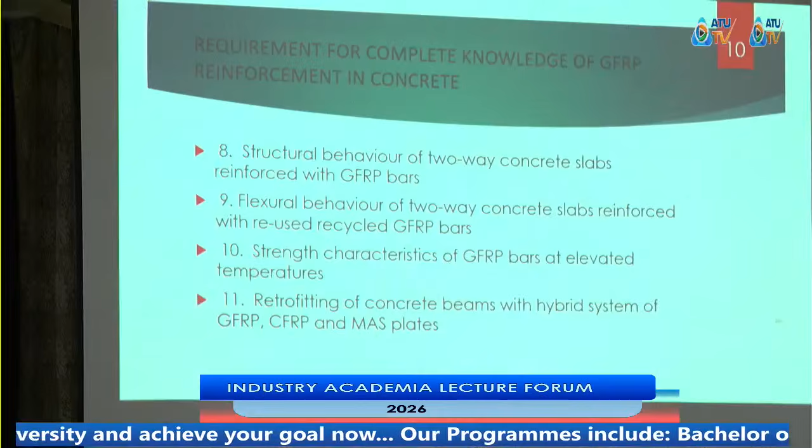At KNUST, we conducted some research works, including the mechanical properties of glass fiber, and one of our presenters will come out with findings that indicate the strength is dependent on the bar size, which is not like steel. The modulus of elasticity is also dependent on the bar size, and so on. Then the behavior of glass fiber in beams and slabs have also been studied.

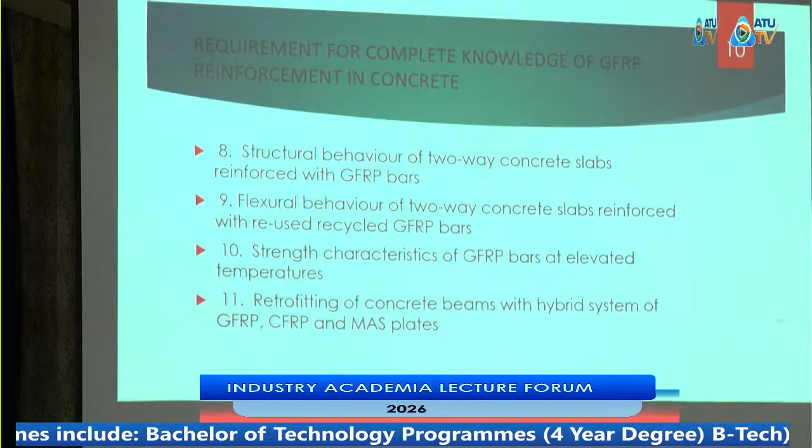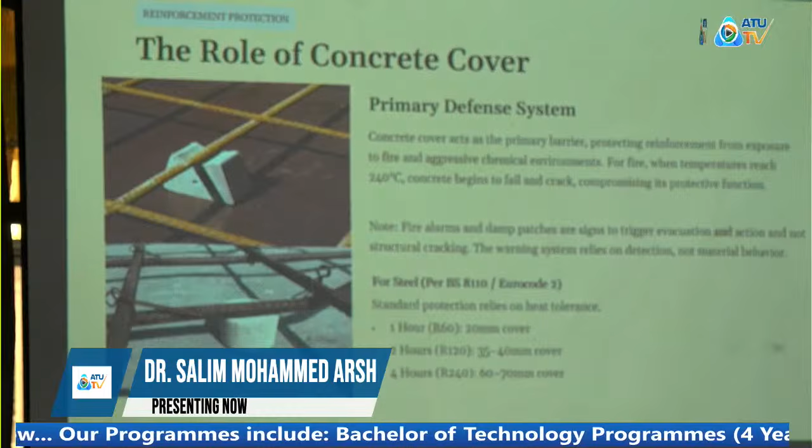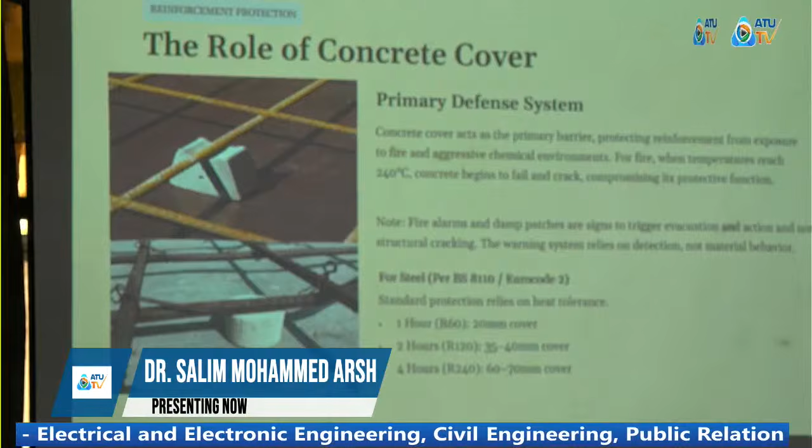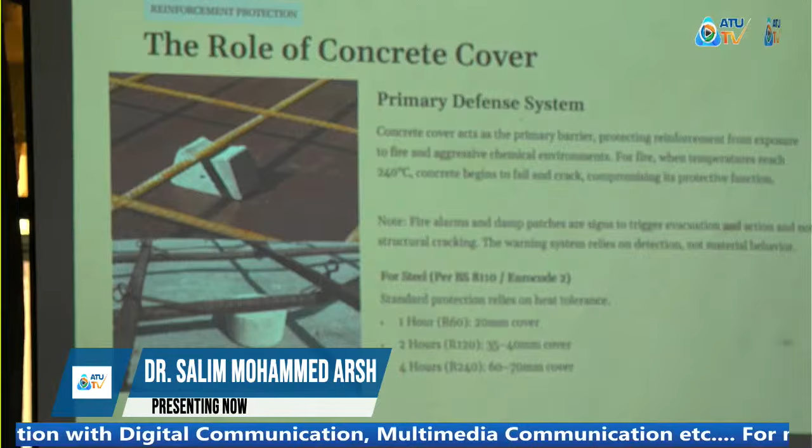Starting with this slide on concrete cover: before discussing the reinforcement itself, it is extremely important to understand the role of concrete cover, because concrete cover is the primary protection mechanism in reinforced concrete structures. It acts as a thermal barrier, a corrosion protection layer, and also a durability protection system, because in an instance of fire exposure, the external surface temperatures could go up to 800 or 1000 degrees Celsius. However, because concrete has relatively low thermal conductivity, the heat penetration towards the reinforcement usually occurs gradually as per how the code specifies. For instance, BS 8110 and Eurocode 2 specify standard protection according to the amount of time needed for evacuation upon occurrence of a fire, to prevent the sudden collapse of the structure once heat gets into the reinforcement. We can move on to the next slide.

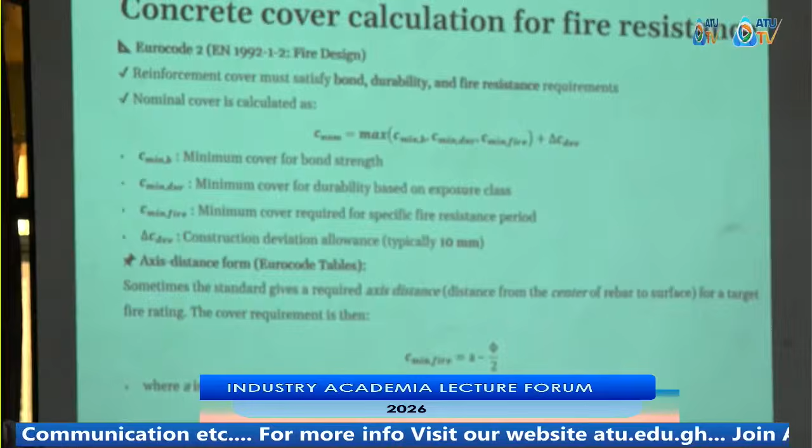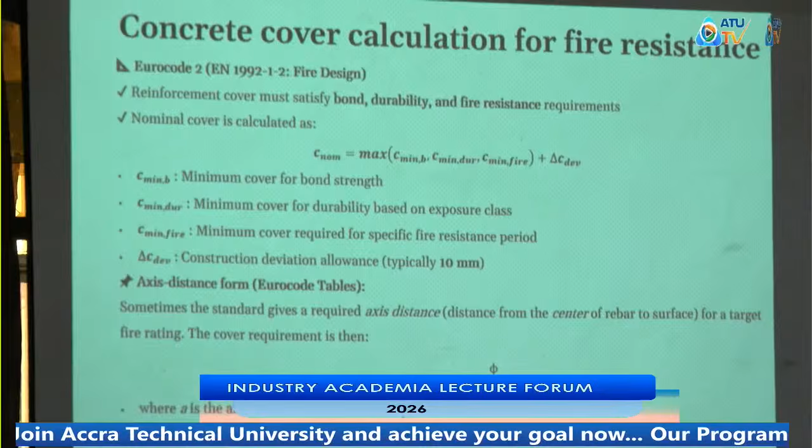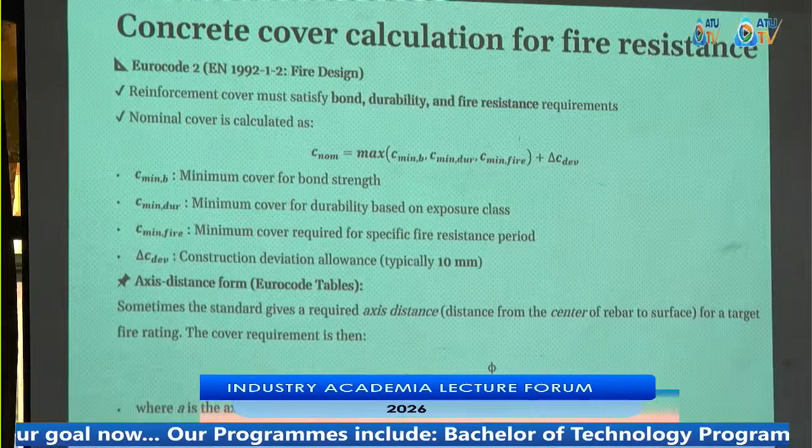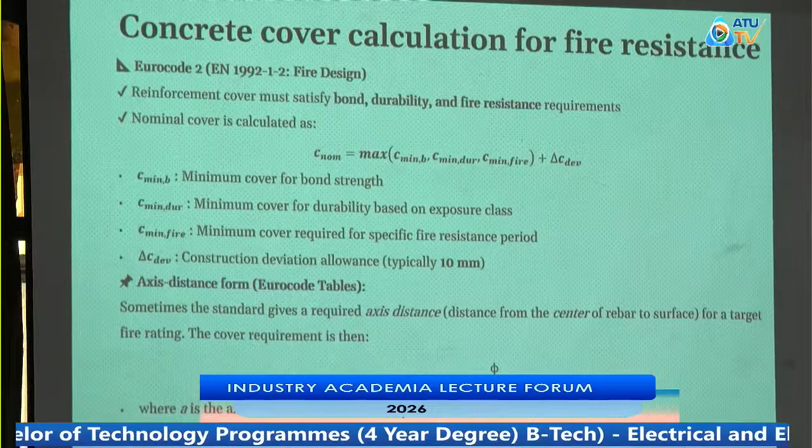This section basically emphasizes the previous slide, showing the calculations for concrete cover and how crucial and specific it is in the design, because this ensures corrosion, fire, or salt water does not get to the reinforcement. This is the protection of the fiberglass reinforcement, the steel reinforcement, and the other FRPs. So this is an emphasis of the concrete cover and design calculations. We can move on to the next slide.

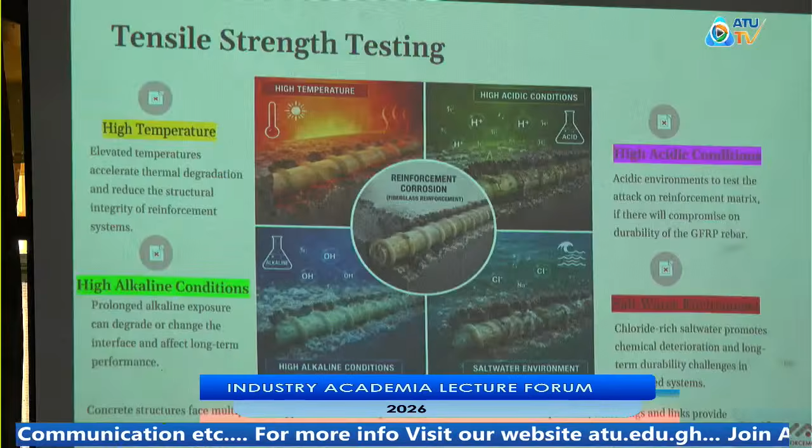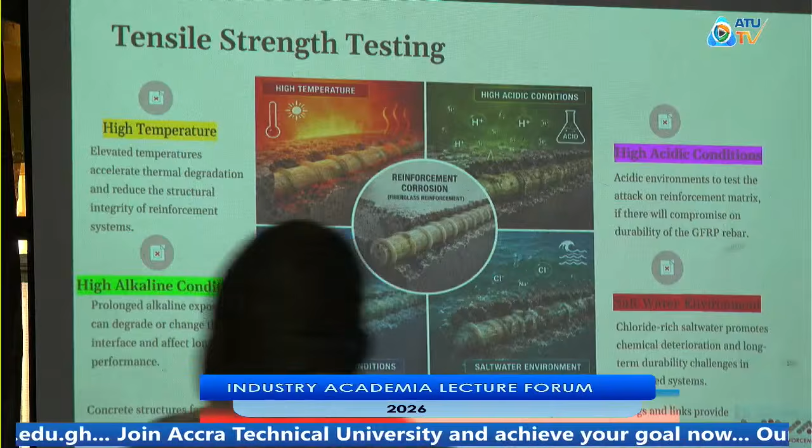Moving on to my first test at university level, which was tensile strength testing under different environmental characteristics, trying to test the limits of the Viva bar. Most of the research I found from Ghana had already tested the basic tensile strength, from Professor Kankam and the researchers, so I wanted to take it a step further and test it against high temperatures. For high temperatures, I picked 240 degrees Celsius. Why 240 degrees Celsius, if you ask? Because this is the temperature at which the concrete cover is compromised and cracking becomes visible, and at this stage the fire is already reaching the reinforcement inside.

This is the stage where the fire is already reaching inside the reinforcement, which at this point would already be compromised. So I subjected the samples to high temperatures.

Next was high acidic conditions, trying to test the corrosion of the fiberglass rebar material, because we know steel reacts with acidic conditions and gets eaten away. I concentrated a 0.1 molar sulfuric acid, achieving a pH of about 1.54, a very concentrated acid, and subjected the samples for 7 and 28 days to test early and late stage corrosion.

Then I moved on to high alkaline conditions, since concrete is highly alkaline. I subjected it to concentrated calcium hydroxide, because material properties could change once the fiberglass is submerged inside concrete. I did this as well for 7 and 28 days, for early and late stage curing.

Finally, I exposed it to a salt water environment, because where I'm from, a coastal island in Mombasa, Kenya, salt corrosion of steel bars is very high. You leave reinforcement outside for 1, 2, 3 days and start seeing rust on top, which in the long run affects the performance of the material.

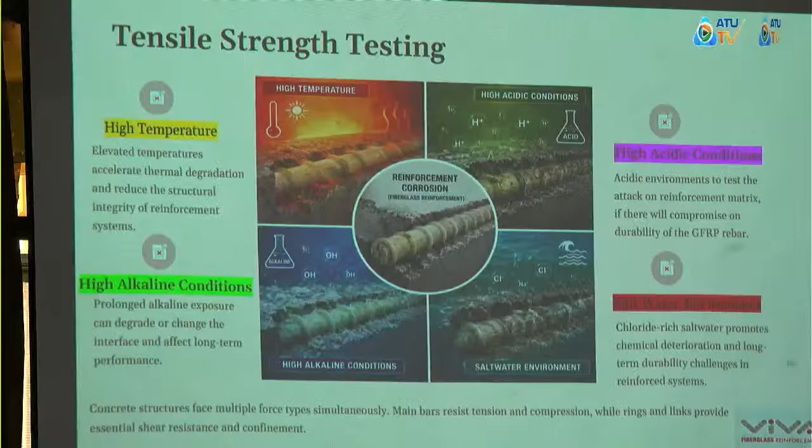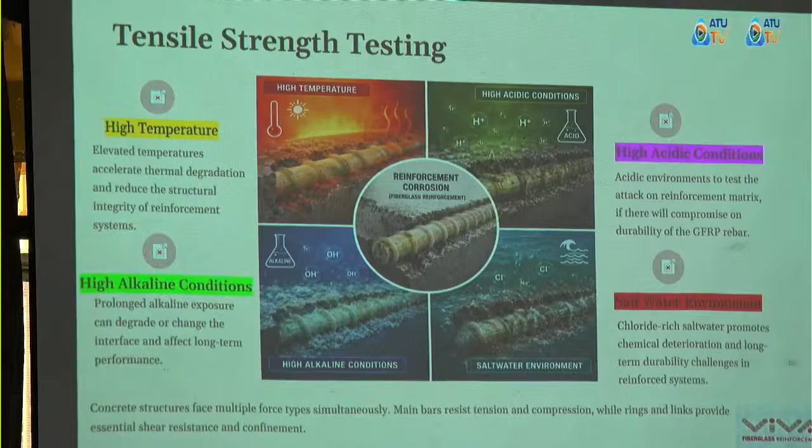After subjecting the reinforcement to these harsh environmental conditions, I can attest there was barely any change in tensile strength, basically between 3 to 5%. All samples achieved a minimum of 1,150 megapascals, with changes of only 3 to 5%, which is not significant. The material is not corroded by acidic conditions, not affected by temperatures of 230 to 240 degrees, not affected by high alkaline conditions, and not affected by saltwater environments like steel reinforcement is.

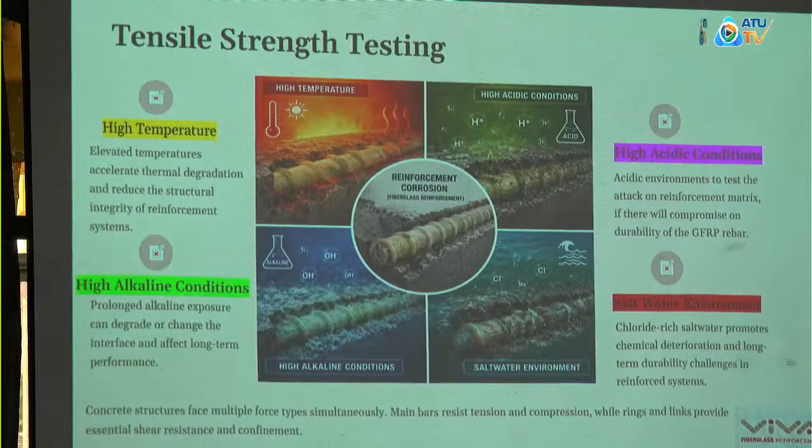Moving on to the next slide, which is impact testing. This section evaluates the toughness and sudden load response of the Viva bar using Izod and Charpy impact testing, because these tests are important since structures are not always subjected to gradual loading.

In real engineering situations, structures may experience impact loading, vibration, accidental force application, debris loading, and sudden stress. These are things that should be catered for at the material level, even before putting it inside the concrete.

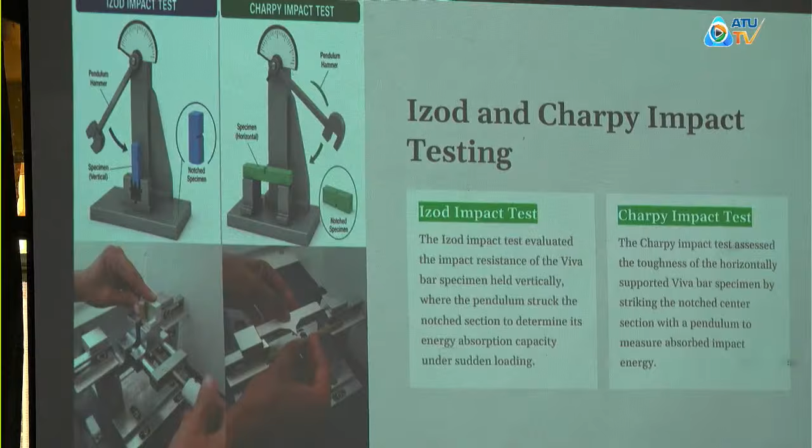The Izod test evaluates impact resistance using a vertically fixed position, and the Charpy test uses a horizontally supported specimen to evaluate toughness through impact energy absorption.

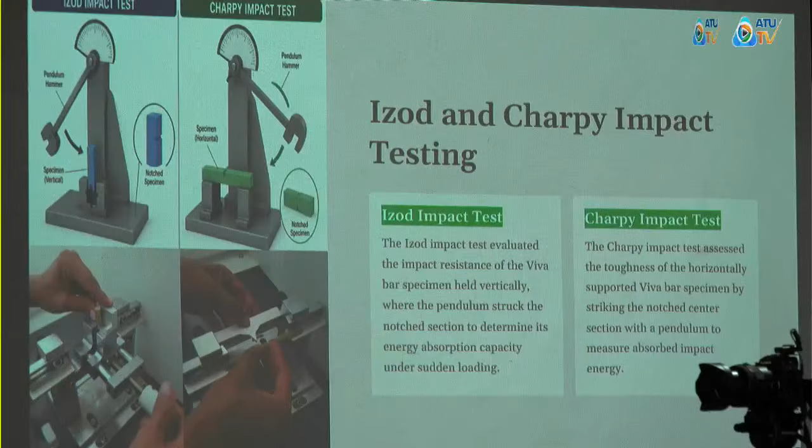One important observation during this test is that the Viva bar did not fracture completely, unlike other specimens put in that machine. This behavior is important because it indicates internal energy absorption, crack resistance, and progressive failure characteristics.

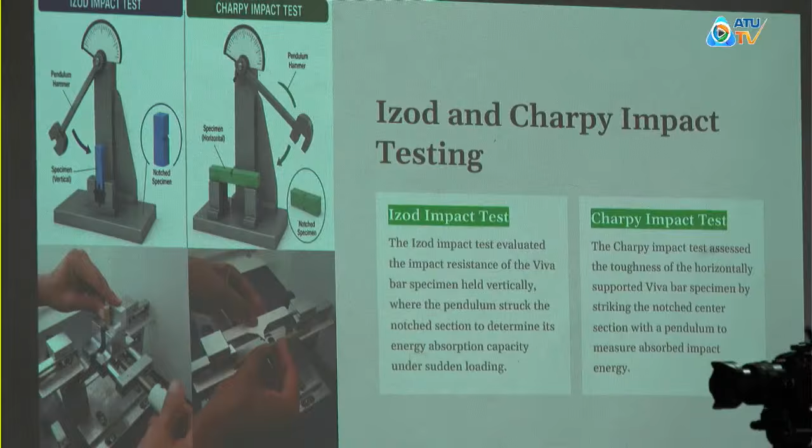For younger engineers and students here today, one important concept to remember is that strength alone does not signify structural performance. Things like toughness, energy absorption, and impact resistance are equally important, because structures must survive unexpected loading conditions, seismic activities, wind loading, and other unforeseen catastrophic failures.

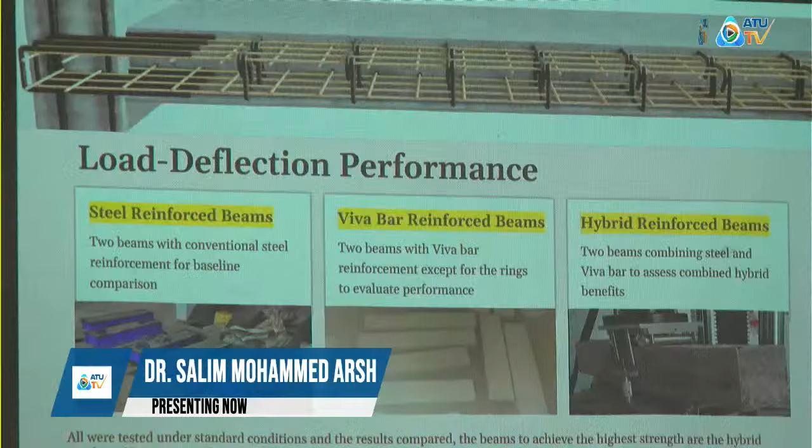Moving on to the next slide, which took me a really great amount of time, this was the beam loading test, beam flexion. For this, I cast 6 beams: 2 were reinforced fully with steel, and 2 others were reinforced with fiberglass, except for the links and U-shapes at the ends.

The last 2 beams were reinforced with the hybrid approach that Viva is vouching for: in the lower members, where there is high tensile requirement, I used the Viva bar, and in the top members, which are subjected to compression, I used regular steel from the market. I left the beams to cure for 28 days before taking them out and putting them in the flexure machine.

The beam that achieved the highest strength was the hybrid beam, because this ensures the materials complement each other: steel contributes to compression and shear at the ends, which fiberglass is not able to do as effectively, while fiberglass handles tensile strength better than steel and holds a much higher strength when it comes to tension.

So the hybrid systems, as I've said, benefit from complementary material behavior, and it is a very important engineering aspect, because modern structural optimization does not necessarily involve replacing one material entirely. Instead, it involves combining materials intelligently so that each material contributes where it does best. And this is the fundamental philosophy behind the hybrid system. Moving on to the next slide.

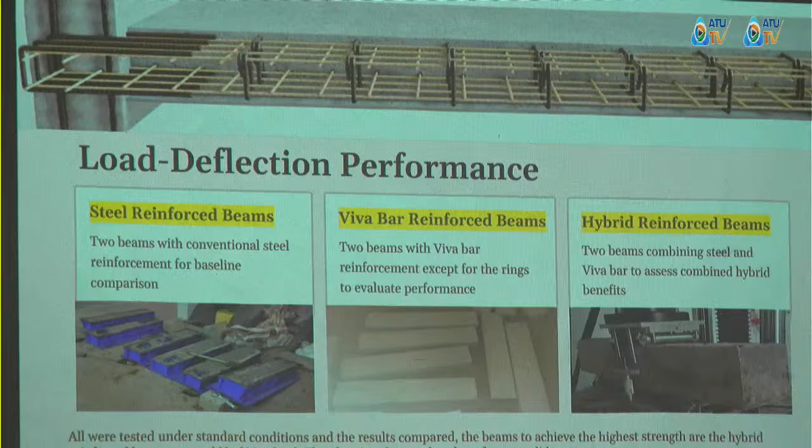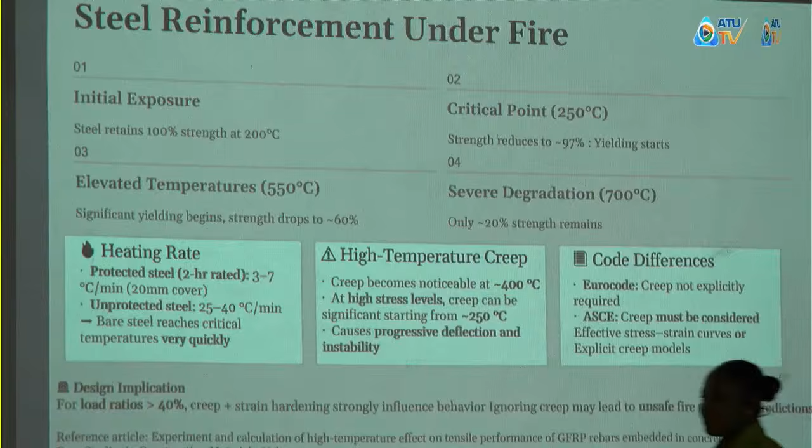This is a test I've done, and I have an article on fire comparing the fire exposure of steel reinforcement to Viva bar reinforcement. As you can see, the steel behaves predictably under elevated temperatures, up to 200 degrees Celsius. Above 200 degrees Celsius, when we get past the point where concrete starts to fail and crack, at this stage the fire is exposed directly to the reinforcement.

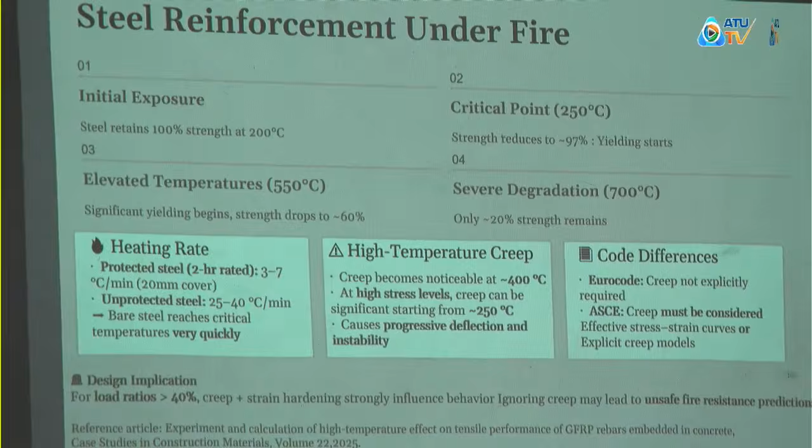This is where steel's graph, according to the ASCE models and the Eurocode models, shows yielding starting. Once the yielding starts and temperatures continue to rise, steel's rate of yielding once exposed to fire is very high, so the failure is abrupt. The time for evacuation, 60 minutes, is usually designed for the concrete cover. But once steel is exposed directly to fire, it no longer holds its ductility as much, because the graph of its loss of strength goes down drastically.

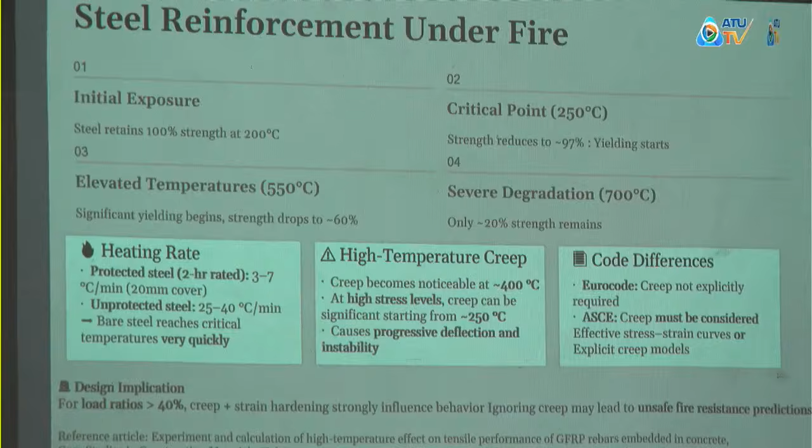As you can see, at 250 degrees Celsius is when yielding initiates and the stiffness begins reducing, and deformation becomes more significant. Even taking temperatures higher to 550 degrees Celsius, steel reduces its strength to about 60%. The deflection increases rapidly, and creep becomes highly influential at this stage. By getting to 700 to 1000 degrees Celsius, only a small portion of the original strength is left, and this is where the building becomes structurally unstable and collapses.

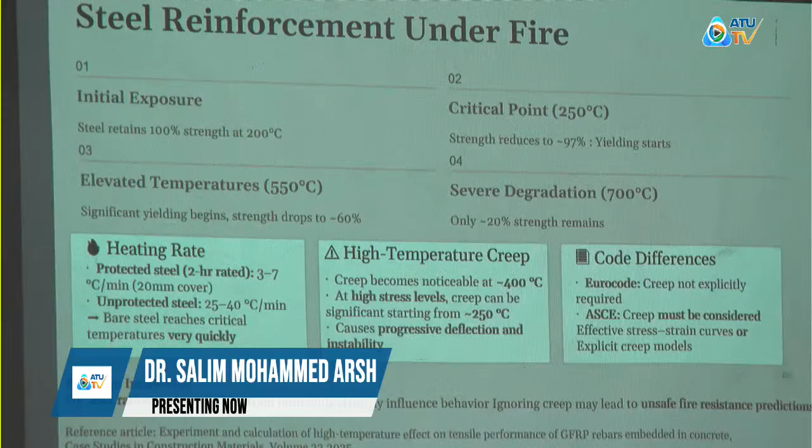An important highlighted issue here is the thermal conductivity of steel, which I'll show on a further slide. Steel transfers heat very effectively. This means that fire exposure in one region can affect reinforcement temperatures across a large structural area. So even unexposed regions may weaken due to heat conduction of the reinforcement network, and you'll be able to see this visually in the next two slides, and I'll explain it better.

However, the Viva bar's performance under fire depends heavily on two temperatures: the glass transition temperature and the decomposition temperature. At approximately 250 to 300 degrees, which is the same temperature where the concrete cover is compromised - that's why I keep stressing the importance of the placement, the spacing, the stools, and the concrete cover to protect the reinforcement from such catastrophic failures.

Between 250 to 350 degrees Celsius, the fiberglass bar has already been exposed to fire. At this stage, the resin matrix begins softening, the stiffness of the material reduces, and the bond efficiency starts to decrease. Raising temperatures to 400 degrees Celsius, resin decomposition becomes significant, and tensile performance starts to reduce rapidly because of the bond strength of the matrix. The fiberglass strands themselves are not affected at 400 degrees Celsius - they're very highly temperature resistant.

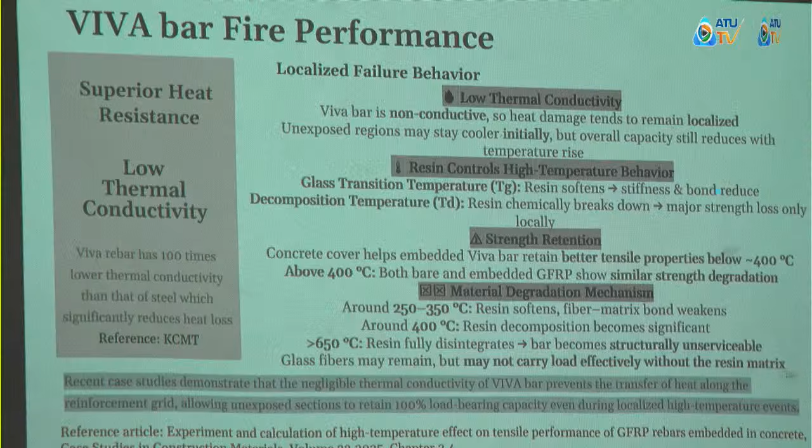Moving up above 650 degrees Celsius, the resin matrix now becomes fully disintegrated. One important engineering observation is that the concrete cover delays this disintegration process for the embedded bars, both for fiberglass and steel, which again reinforces the importance of concrete cover in the material.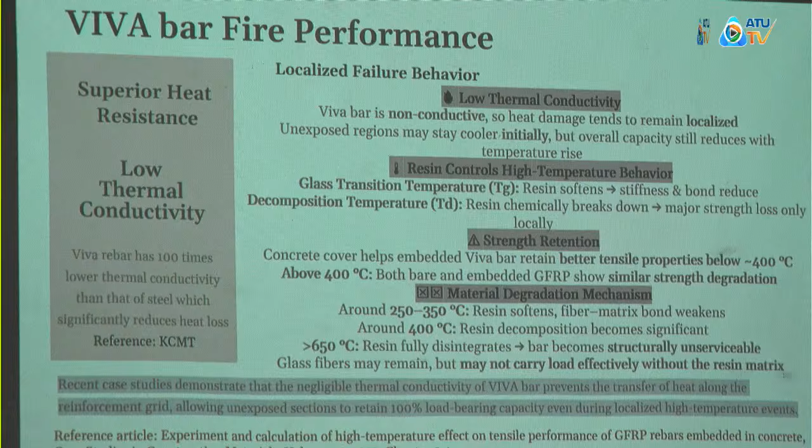Now, the next slide is drawn from the fire analysis of steel and Viva bar that I've done, because this slide highlights one of the most important differences between steel and Viva bar on thermal conductivity. Steel is highly conductive, and once exposed to fire, the heat spreads rapidly throughout the reinforcement network, increasing system-wide thermal degradation. Because of the 100 times lower conductivity, according to the KCMT article, this heat remains more localized in the Viva bar. For instance, if one part of the slab experiences fire exposure, there is no conduction that would lead to heat generation in a system-wide nature.

This does not entirely eliminate the degradation, but it changes and limits the heat effect onto one part of the slab, increasing the time for evacuation and for people to be safe and secured inside a building experiencing fire. From a structural engineering perspective, this becomes highly important when looking at localized fire mechanisms and system level resilience. This is also why hybrid reinforcement systems are becoming increasingly important in advanced infrastructure design.

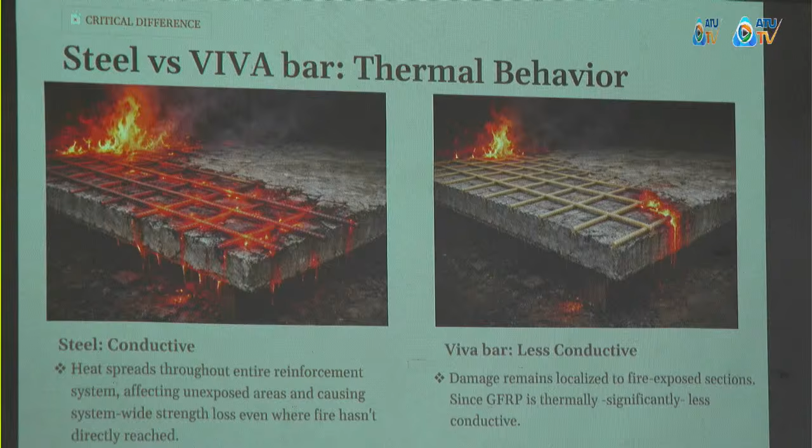Moving on to my conclusion and recommendations. This research demonstrates that fiberglass reinforcement provides significant advantages in corrosion resistance, durability, sustainability, and reduced maintenance requirements.

However, the most important conclusion is that no reinforcement is universally perfect, and good engineering design is not about replacing one material blindly with another, but about understanding behavior, structural interaction, environmental exposure, and long-term performance.

This is why us young engineers and researchers should take the opportunity to criticize the material, to look at what tests we can do, how we can improve on whatever we are working on, and what technology is out there that can be explored to increase the efficiency of our already built and placed structural designs.

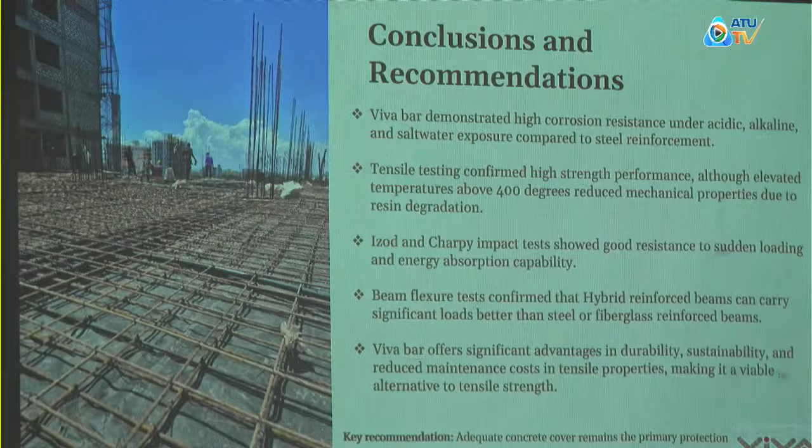Because the hybrid philosophy, according to my conclusions, represents an optimized approach rather than a replacement strategy, since steel contributes in compression, shear, bending, redundancy, and the established fire behavior that is already there, while the Viva bar contributes corrosion resistance, high tensile properties higher than steel, low thermal conductivity, and improved durability performance.

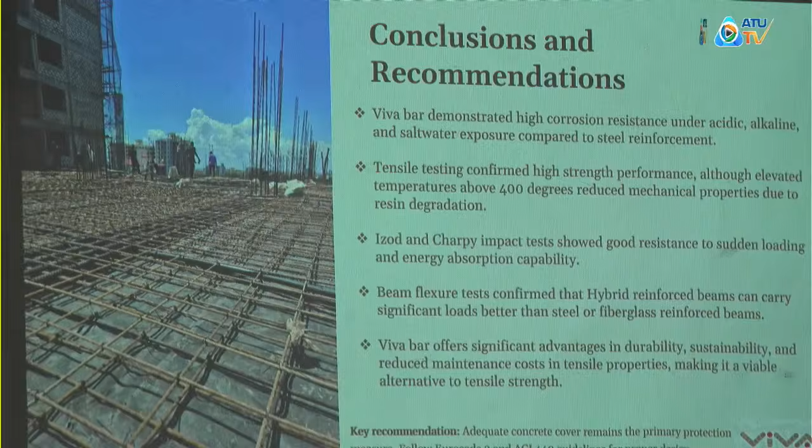So these two materials - you have to see how they can both work hand in hand to achieve the best results. Together, they create a more balanced structural system, and this is where the future of advanced reinforced concrete design is moving.

Before I conclude, I would also like to say a few words to the upcoming engineers present here today, because engineering is a very wide field. Sometimes when I was a student and a young researcher, we think engineering is only about passing exams, attending lectures, and completing projects. But in reality, engineering has a much bigger scope than that, because it's about problem solving.

Engineering is about innovation, curiosity, research, and continuous self-development. One thing I strongly encourage myself and the audience present, especially the students, is that you need to become more proactive very early. Do not wait until graduation or when you receive the paper to start building your engineering capability.

There are things you can learn besides the curriculum. You can learn software design, the design analysis that is out there, the structural softwares that are used. You can visit sites, join research programs, ask questions, and read research papers - like Professor Kankam has a lot of them, and he has a lot of research students. You can start from there.

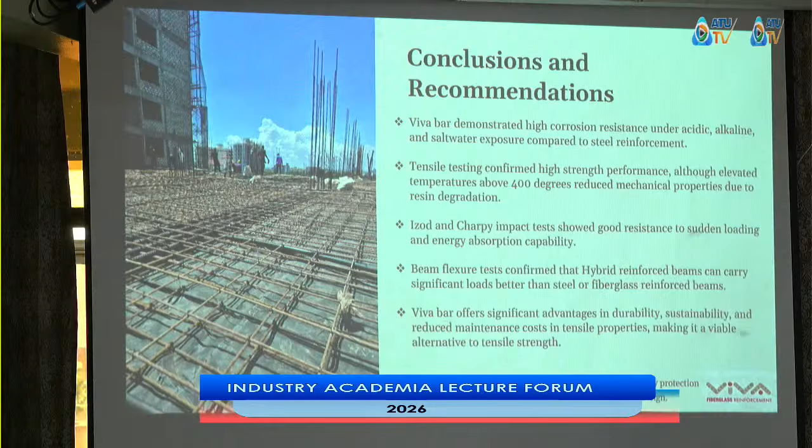Engineering as a whole has very many niches, because some engineers are excellent in structural analysis, some in materials - it's a wide field: transportation engineering, water engineering. There's a lot you can look into to develop yourself for further knowledge and broadening of the mind, because no one has studied everything. There's always something you can add on, always some sort of value you can add to yourself.

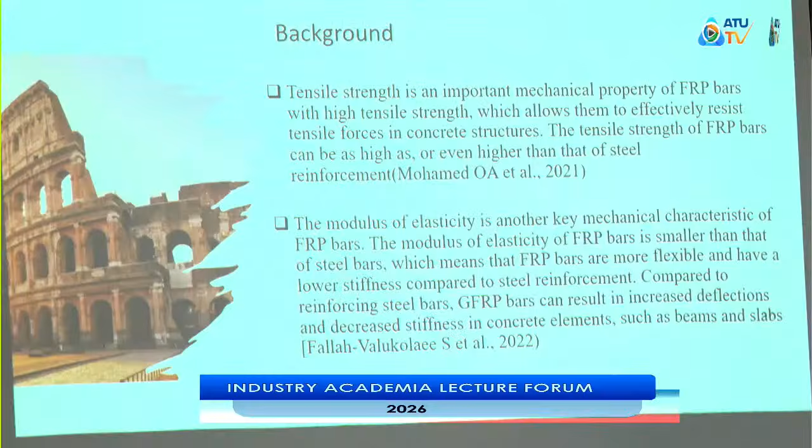Okay, so tensile strength is an important mechanical property of FRP bars, like already said, with high tensile strength, which allows them to effectively resist tensile forces in concrete structures. Okay, so the modulus of elasticity is another key characteristic of FRP bars. The modulus of elasticity of FRP bars is smaller than that of steel, which means that FRP bars are more flexible and have a lower stiffness compared to steel reinforcement.

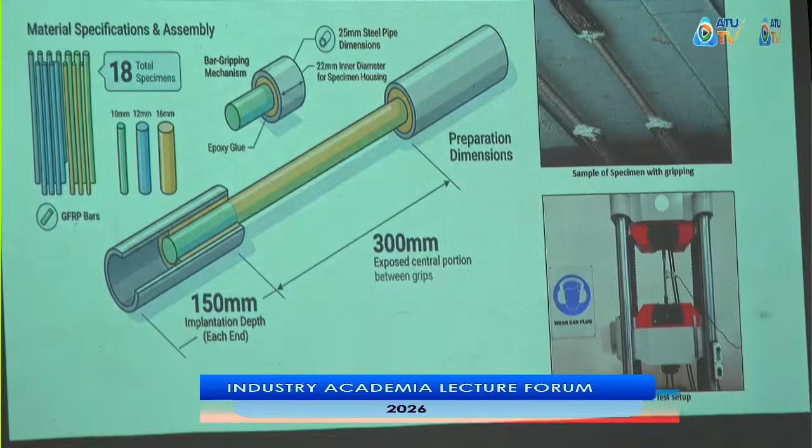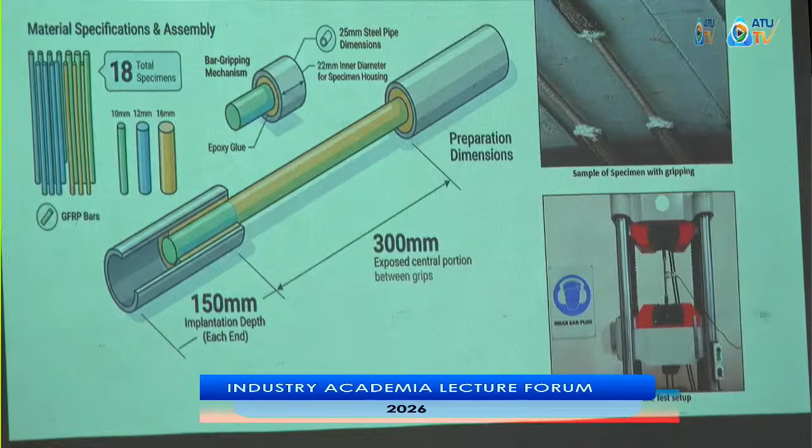In preparing the specimen, the researcher had 18 total specimens of GFRP bars, and cut 300 mm lengths of the GFRP bar. Because the ends of the GFRP bar fracture when in compression, the researcher had to hook the ends with a 25 mm steel pipe and use epoxy glue to hold it so that the tensile strength test could be performed.

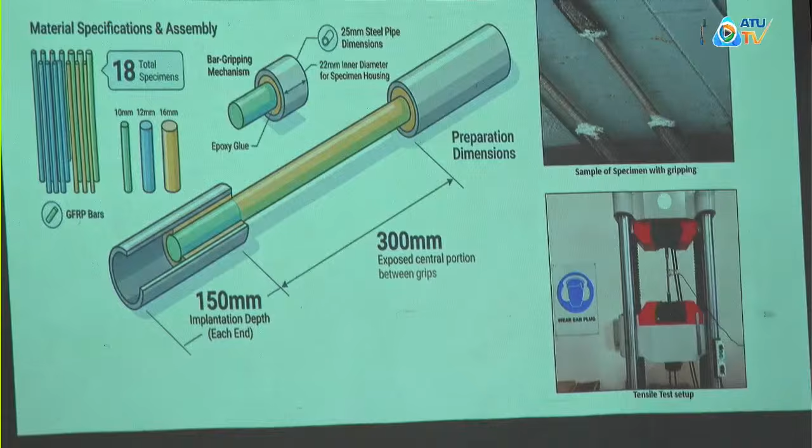Here is a picture of the sample specimen with a grip shown at the top right, and the universal tensile machine used to test the tensile strength.

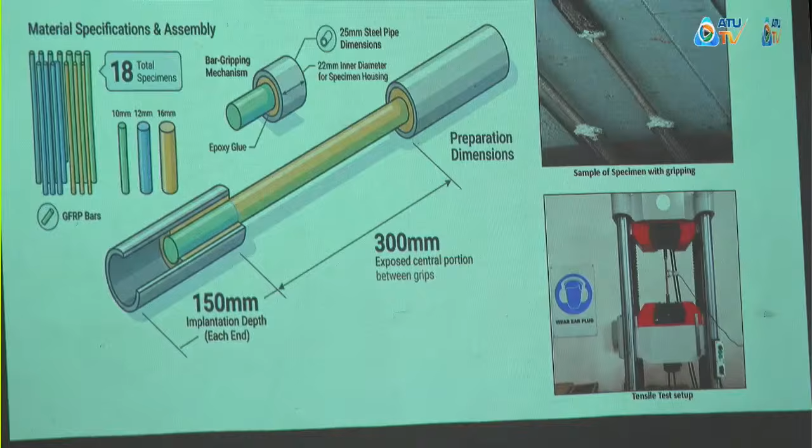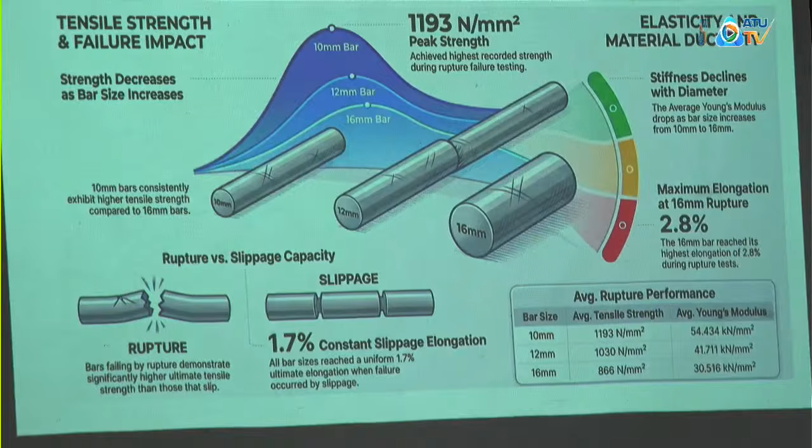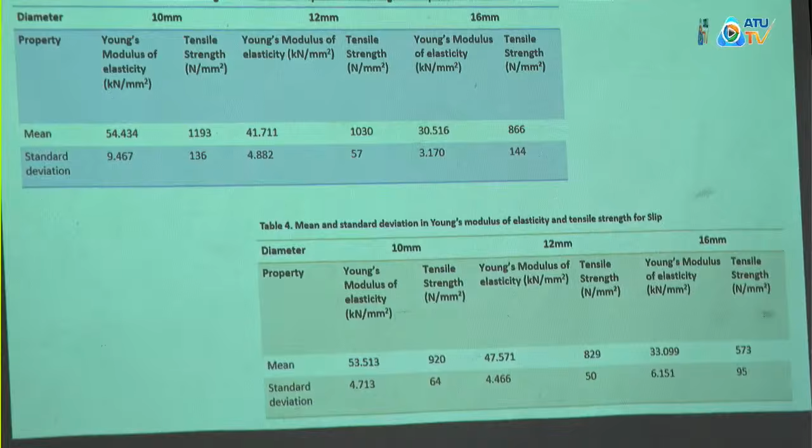This table also gives the results of the GFRP mechanical properties. For each diameter of bar - 10 mm, 12 mm, 16 mm - we have the Young's modulus of elasticity and the tensile strength. For tensile strength, the 10 mm bar has 1,193 newtons per millimeter squared, the 12 mm has 1,030 newtons per millimeter squared, and the 16 mm has 866 newtons per millimeter squared, showing that the smaller the diameter, the higher the tensile strength.

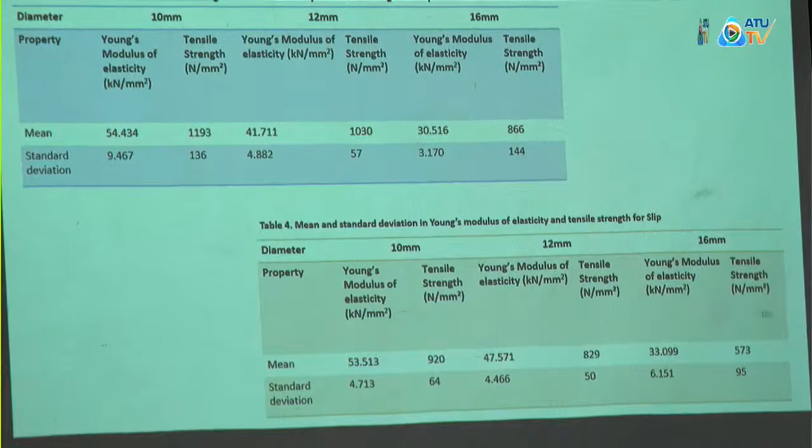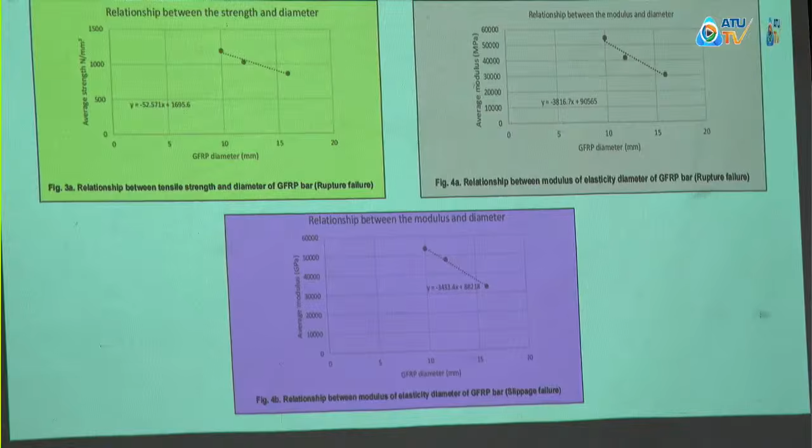This is a graph of the relationship between the bar diameter and the strength.

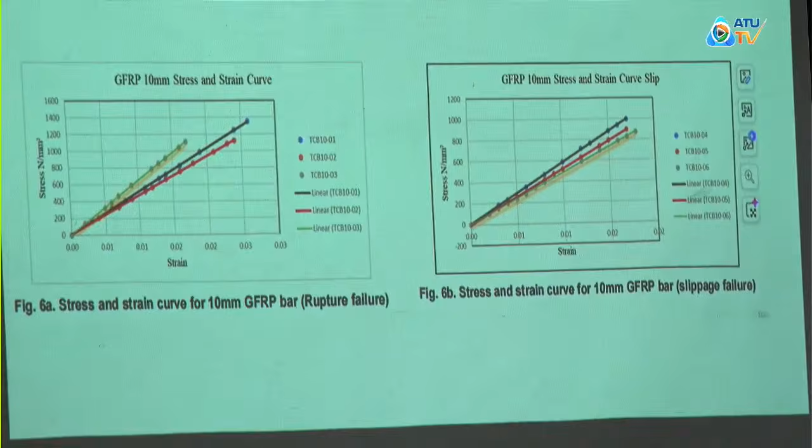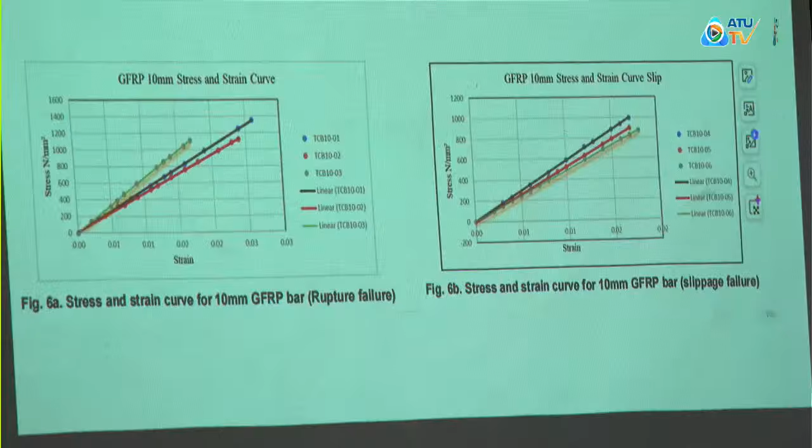Here we have the stress-strain curves of the GFRP bars. As earlier cited by Professor Kankam, the researcher realized that the GFRP bars are linearly elastic. We have the stress-strain curve for the 10 mm bar when the GFRP ruptured, and the stress-strain curve for the 10 mm bar when there was slippage failure. In both cases, the GFRP bar is linearly elastic.

The same applies for the 12 mm and 16 mm bars.

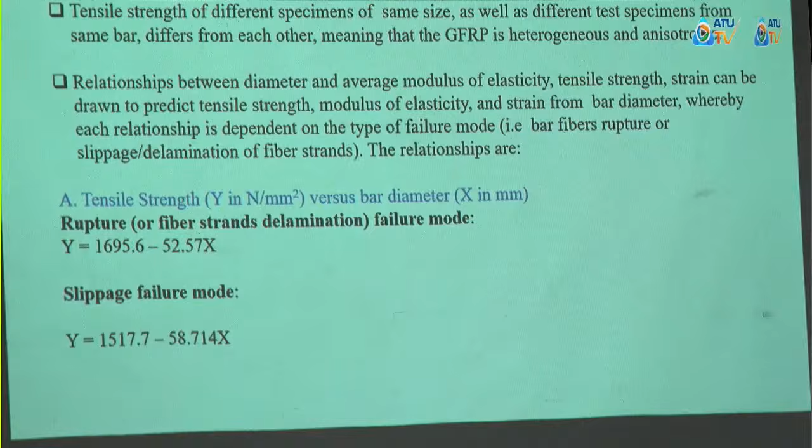Tensile strength of different specimens of the same size, as well as different test specimens from the same bar, differs from each other, meaning that the GFRP is heterogeneous and anisotropic. There is an equation for the rupture mode and the slippage failure mode.

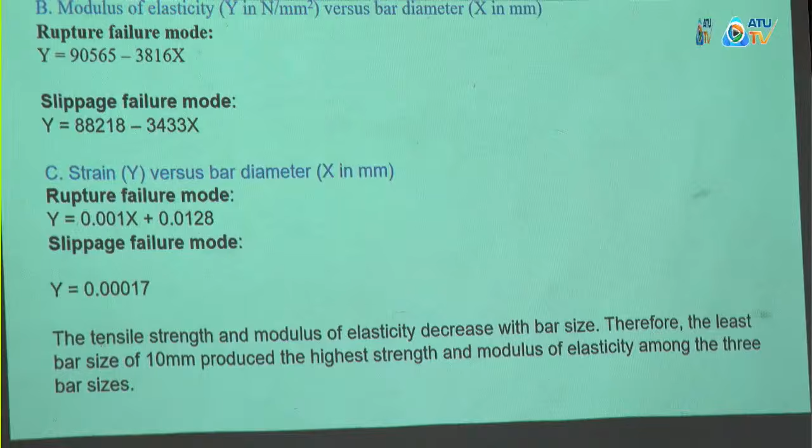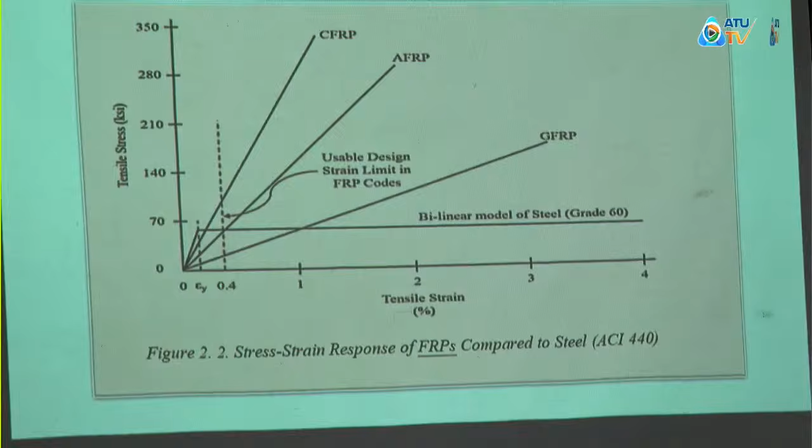This graph gives us a comparison of the FRPs as compared to that of steel.

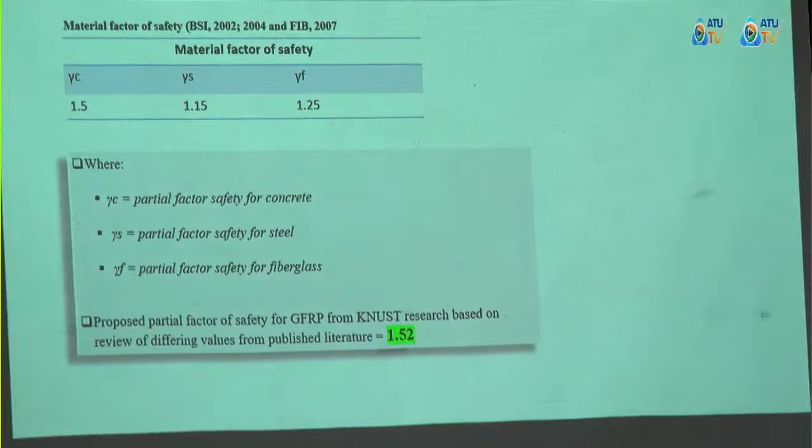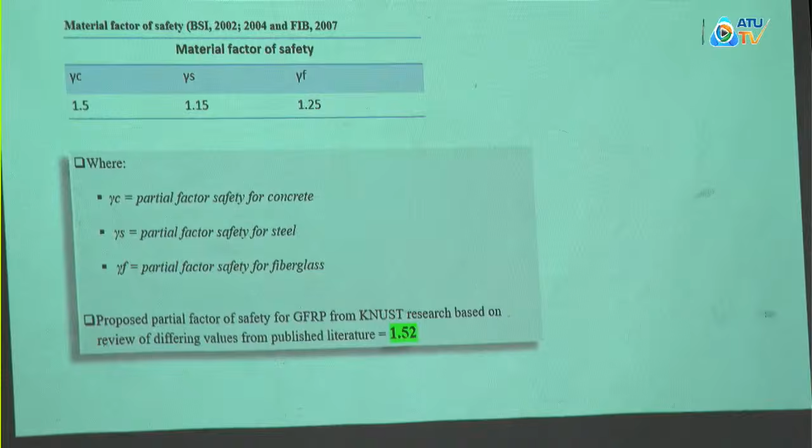The researcher concluded that the proposed partial factor of safety for GFRP, based on the literature reviewed, is 1.52. We know that of concrete is 1.5, and that of steel is 1.15, but we are proposing 1.52 for GFRP.

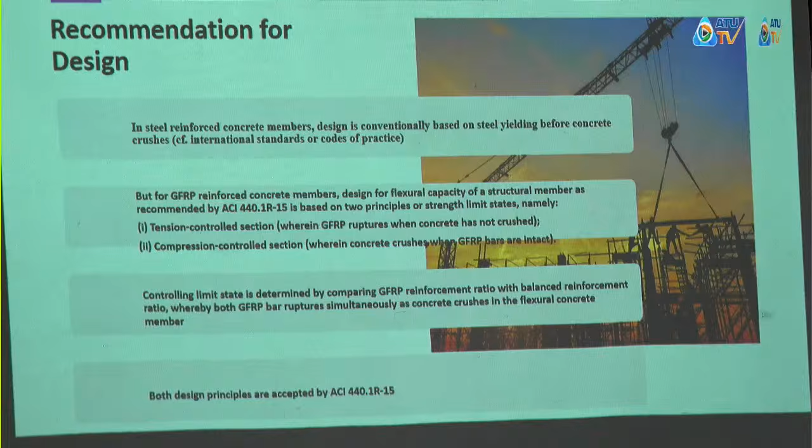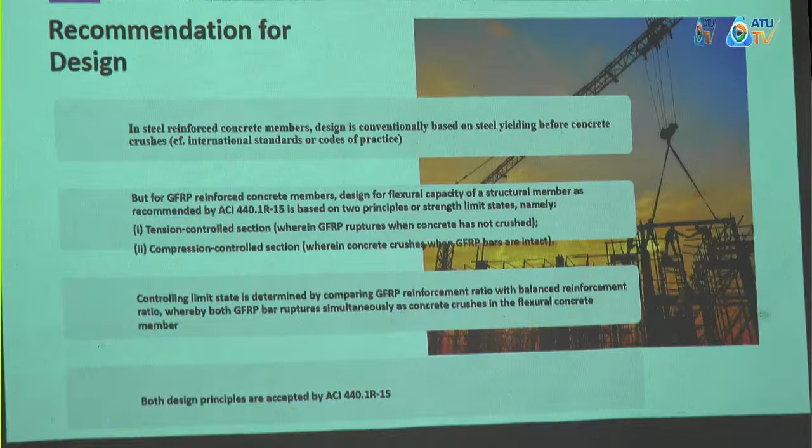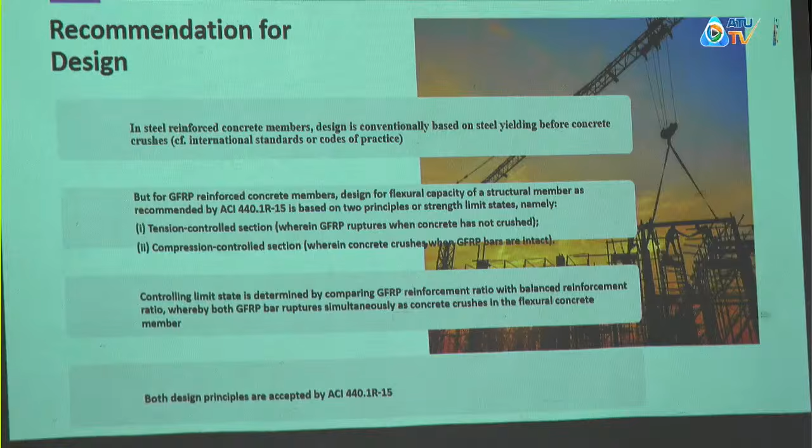These are his recommendations for design. In steel reinforced concrete members, design is conventionally based on steel yielding before concrete crushing, as earlier cited by Prof. Kankam. But for GFRP reinforced concrete members, design for flexural capacity, as recommended by the ACI code, is based on two strength limit states: the tension control section and the compression control section. The controlling limit state is determined by comparing the GFRP reinforcement ratio with the balanced reinforcement ratio, whereby both the GFRP bars rupture simultaneously as concrete crushes in the flexural member. Both design principles are accepted by the ACI code.